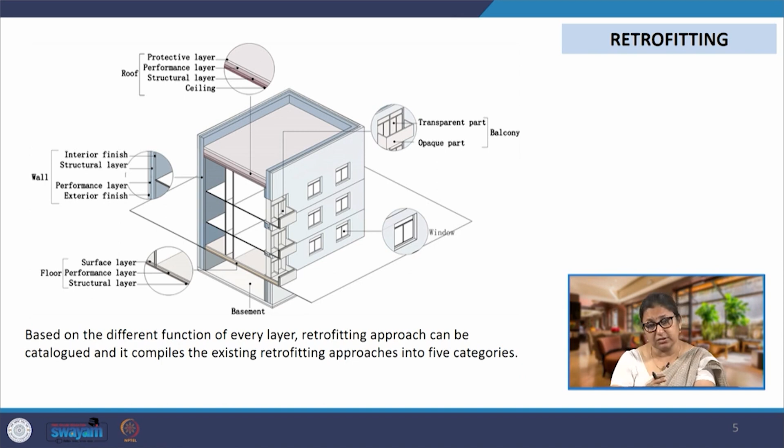Plus we have the MEP, mechanical, electrical and plumbing systems, where a lot of retrofitting measures go. Now, based on the spatial requirement, the services requirement, the functional requirement, different approaches can be taken. So there are 5 different approaches that we would normally see when we are going ahead with retrofitting.

The first one is to replace a certain part of the envelope. So we could be replacing an entire wall if it is not performing well or it has crumbled for structural reasons or whatever. So we could be replacing an entire building element. That is the first approach, which is replace. And all these 5 approaches could be used in the same building for retrofitting.

So it is not that if we have used replacement as a strategy, we cannot be using add-ins, wrap it, add on, or cover it. We can use all 5 of them together on different building components. So this is the first one, which is replace.

The second one is add in. So here we add new elements or materials inside the envelope system. The envelope is already existing and we add the new elements and materials inside.

When we say wrap it, which is the third strategy, we wrap it with a second facade. So the existing building is there, and on top of that we create another facade layer and wrap the entire building in this second layer, which is wrapping.

The fourth one is add on. We add new elements or materials on the outside of the envelope system. So the envelope existed, and then we add an additional layer, the element or material, but we are not covering all of it. We are not wrapping the entire building, but only adding some elements on certain facades or certain building components.

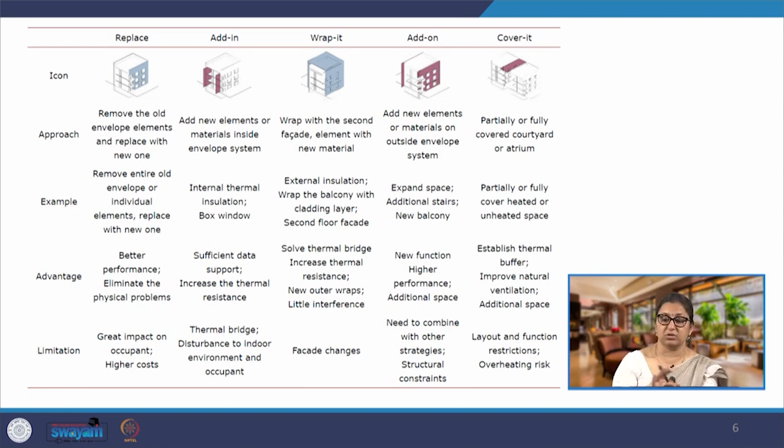And then cover it, where we partially or fully cover the earlier open or semi-open parts of it. So maybe we are covering the balcony, we are covering the courtyard. This will be part of cover it. Now all of these strategies, as I said, could be used simultaneously within the same building, but on different components.

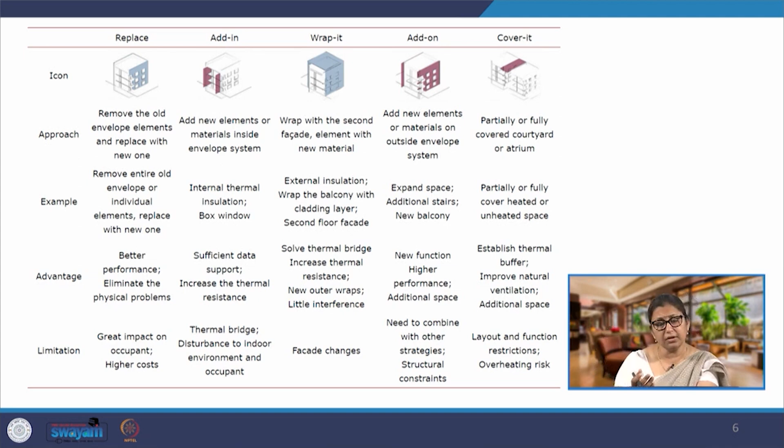Now looking at an example of each one of these: when we are talking about the replacement of a building element, of the envelope element, what we could be doing is, for example, there was a brick wall, but now we want to construct some load on it or an extra story on it. So we could be replacing this brick wall with a shear wall, or we could be replacing an entire wall with a glass facade.

Suppose the use of this space is changing, and we are making it from an office building into a restaurant or a party hall, a banquet hall. There we might want more of a glazed facade for people to see from outside to inside and vice versa. So we are replacing an entire component - that is replacement.

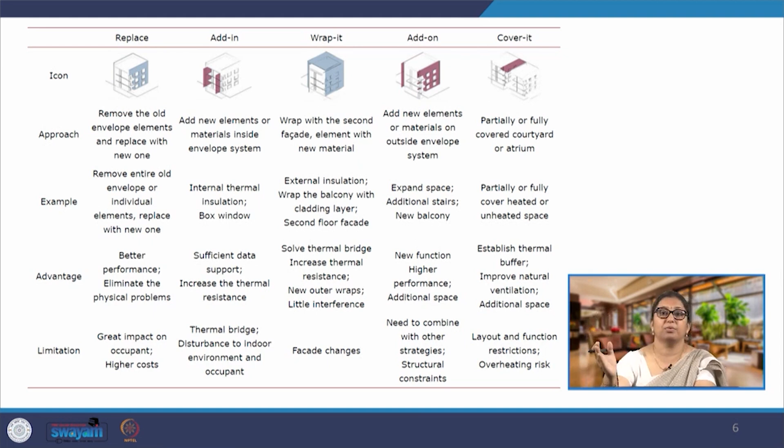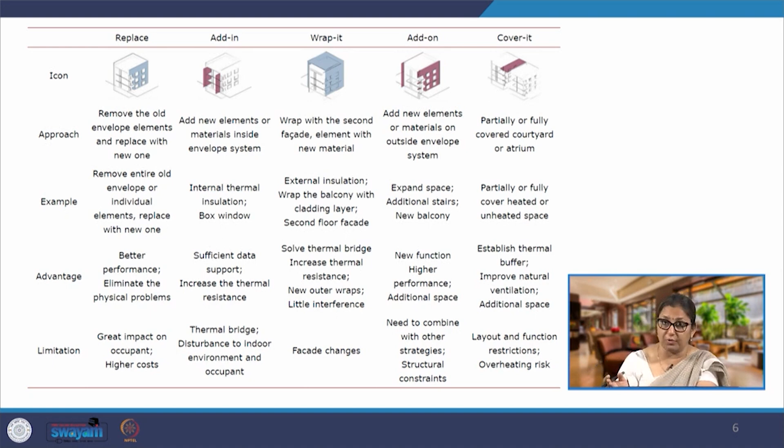Now add-ins, for example, we can add thermal insulation inside - this will be an example of add-in. If we are adding the insulation on the outside and an entire layer is being added, that will go in add on. So we are adding on top of it, or we may be adding a complete insulation plus the top layer, the protective layer or the aesthetic layer, the metal cladding. So this will all go as part of add on.

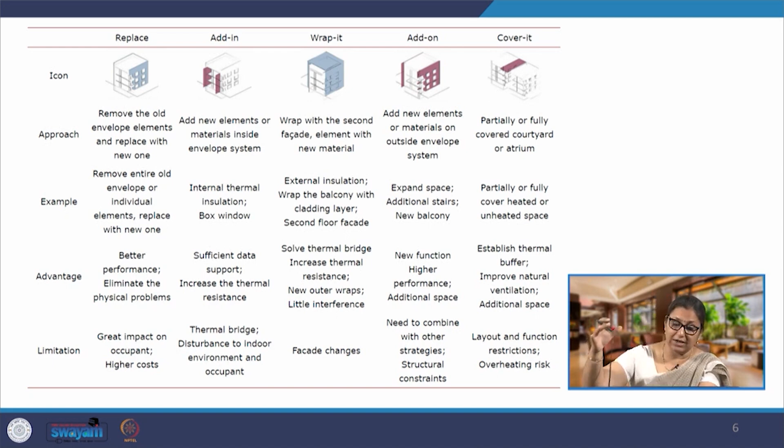When we say wrap it, it could be external insulation, but the entire building is covered using it, or it could just be, say, a metal sheet cut using CNC with beautiful patterns, creating an additional layer of shading, with a gap created in between to be used as a corridor. So this is wrapping the entire building using the second layer.

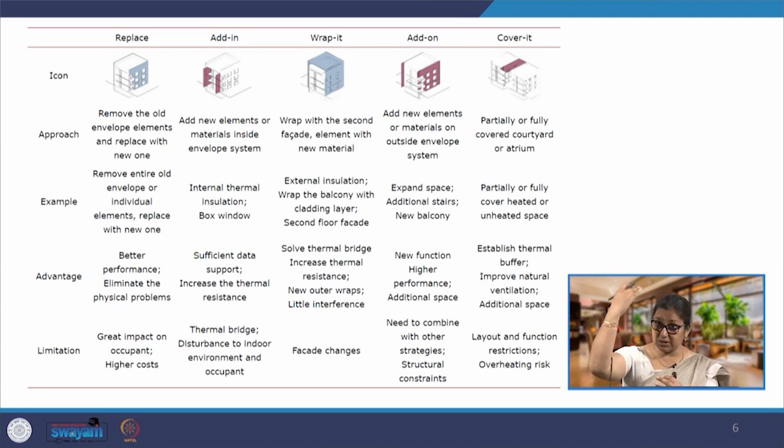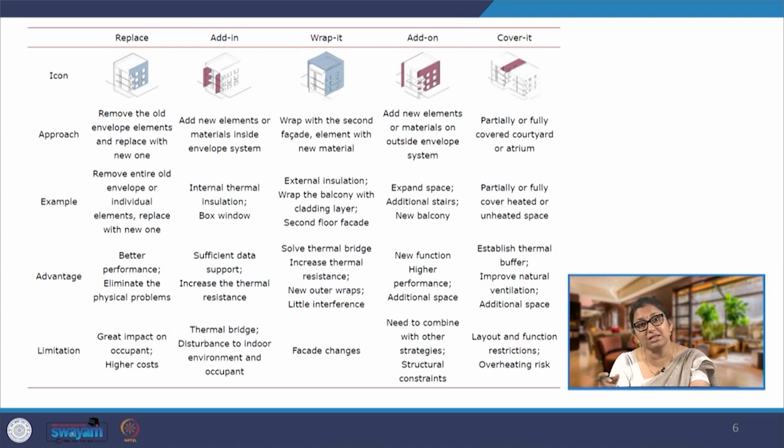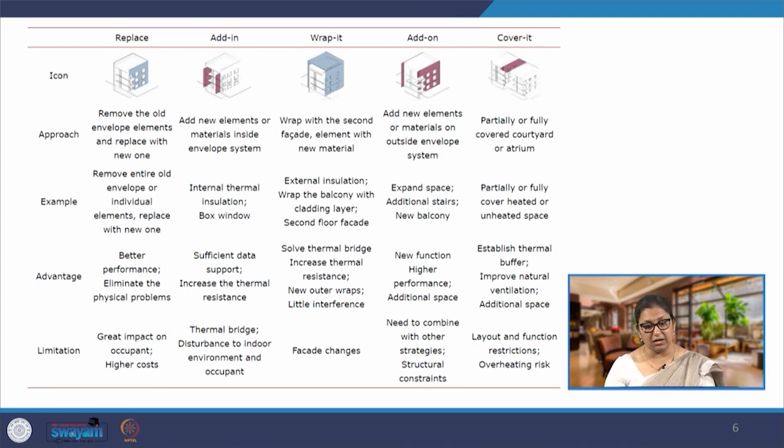And when we say covering, we may be covering these spaces - courtyard or balcony - to heat them or cool them, which was previously unheated or uncooled, a non-air-conditioned part. So we cover it in a manner that it now becomes integral to the indoors of the building. So these are the different 5 approaches in which we can go ahead with retrofitting.

So, 5 different approaches, and how we go about them in a stepwise manner could also vary - it has to vary from project to project. There cannot be any one sacrosanct linear process for retrofitting, because each building was serving a different purpose and is now being retrofitted for a different purpose. There could be occupants already occupying the building, so it is done in a phased manner where some part of the building is retrofitted at a time.

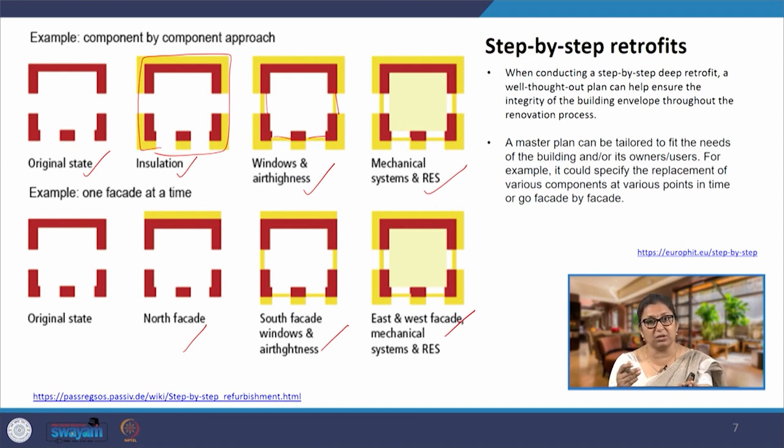So, doing the exteriors first and then gradually moving into interiors, that too in a phase-wise manner. That is what will define what approach we take.

Now, why are we retrofitting? Largely, a lot of retrofits are getting done because of energy requirements, to reduce operational energy requirement. This reduction helps us get a significant reduction in scope 2 emissions. So the moment I say reduction in operational energy requirement, we are directly reducing the scope 2 emissions.

Now, there could be a question in your mind, a contest that we are adding extra materials, for example insulation, which will be synthetic. There could be scope 3 emissions coming along with the material, and then we get scope 2 emission reduction. So we are adding scope 3 upstream emissions while reducing scope 2 emissions. How do I balance it out? Maybe eventually we would be getting higher emissions at the end of the building product's life cycle.

So what we have to do is a proper calculation: how much scope 2 emission savings are we getting versus how much addition in scope 3 upstream is being added. If we compare both together and actually get the life cycle emissions over the entire life cycle of the building, we would be able to make a clear decision on what to use and what not to use.

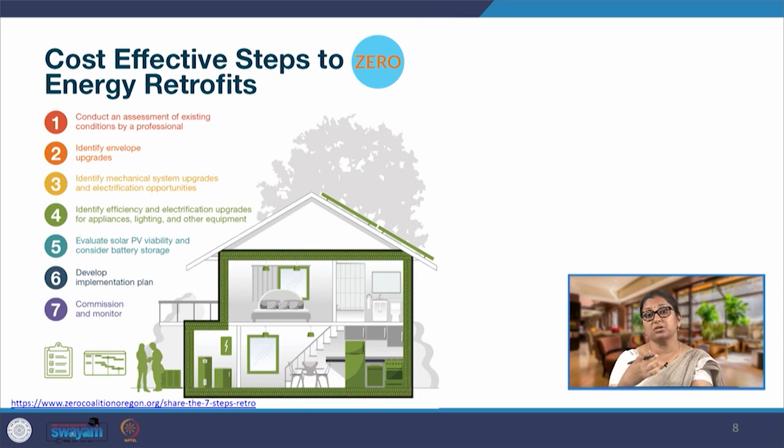So, we have to develop a proper implementation plan for how the retrofitting will be done in a phase-wise manner, and finally commission it. Monitoring becomes extremely important because a lot of times we design absolutely correctly on paper, but when it comes to implementation and monitoring, due to lack of monitoring and commissioning, the systems are installed in a manner that they do not perform as well as planned and desired.

Now, if we look at retrofitting techniques, there could be two. One, when we say retrofitting, we could be retrofitting the structure. In a lot of cases we would need to retrofit the structure, because in retrofitting we are also changing the usage of the space most of the time. So we are retrofitting it to be used as some other type of building, maybe a residential building converted into an office building, or an office building converted into a residential or recreational building. So there could be structural changes also.

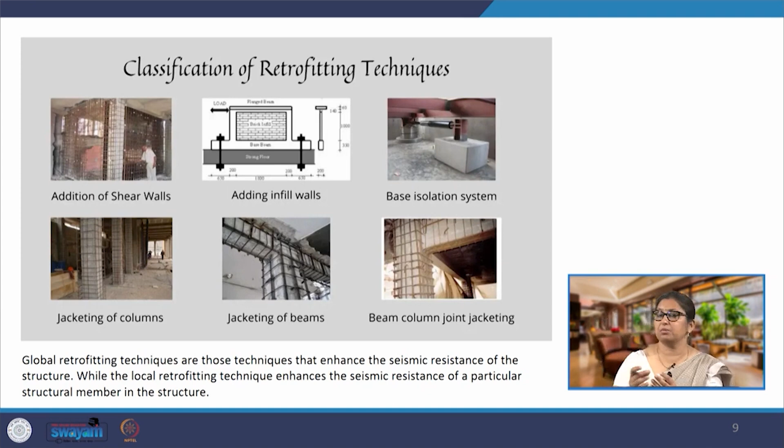So what we would see is solution strategies such as structural jacketing of beams and columns, and provision of extra reinforcement in the roof. So all these are structural retrofitting which might be required, not just for energy retrofit but for structural purposes. We may need to add certain extra columns or move certain walls. Additionally, if it was a load bearing wall, we may need to provide an additional structural beam or something like that. So these are the different structural retrofitting requirements which we might be needing.

Now moving on to renovation. When we look at renovation, we are looking at three primary objectives. One is to increase the lifespan. Why do I want to renovate? I want to renovate because I want my building to be functional for a longer period. Continuation of this functionality has to be there. So that is the first and primary objective, which is to increase lifespan.

The second one is to reduce the demand for material consumption, and this also includes resources such as energy and water, and making use of new generation materials—that is, we are looking at circular economy here. So when we say renovation, the primary objective which the client or occupant would have in mind is to add life to this building so it continues to function for another lifespan. Additionally, we are looking at making it more and more efficient. As we go forward we have higher energy and water efficiency standards, plus new generation materials and technologies, so we also have to add them into the renovation plan. These are the three things we have to do.

Now, how do we do that? For increasing lifespan, we are basically trying to increase the intensity of use. For example, as I gave earlier, if an office building has to be converted into a residential building—why? Because the office has become redundant. After COVID, after the pandemic, probably offices are not needed anymore. People are working from home, working remotely. So the office space is now redundant and it can be converted into residential space to increase the intensity of use, which has gone down tremendously for the office building now. That could be the case. So we are looking at increasing the intensity of use.

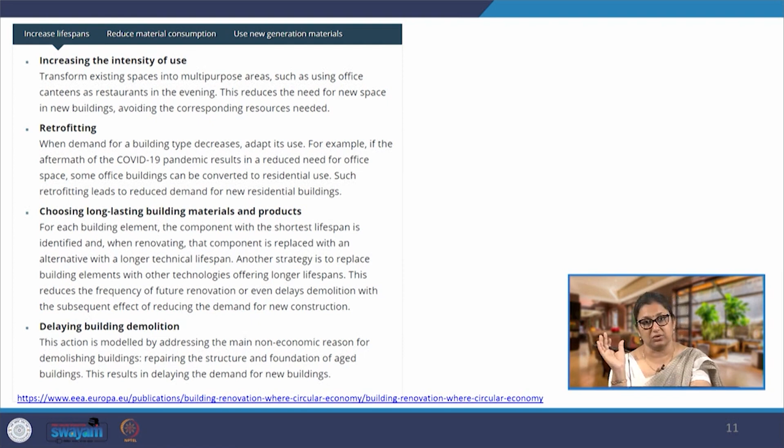We are also looking at not just space retrofitting, but materials which have a longer life, so intensity of use is increased and its life simultaneously is also increased. Through all these measures, we are delaying the demolition. We do not have to demolish the building, making it structurally better, healthier, and putting it to better use with increased intensity of use.

Now, while doing that, we have to reduce material consumption. We do not have to add a lot of material just like a new building. So how do we do that? We basically use products which comply with design for disassembly.

If you consider a brick wall, and it has to be demolished and replaced with another wall, what will happen? A lot of this material, brick, will be broken and will not be put back into use. Some of it will still be, but the mortar and plaster on top of it will surely not be used back into the process. It can be used for infill, or as subgrade or something like that, but it cannot be used back for the same purpose.

However, if we look at design for disassembly principles, the materials which comply with that can be installed and very easily taken out, and they can be reassembled into some other form. So these are the materials which we need to check out for and prefer to use.

Then we have to maximize the recycled content of the materials which are going to be used for renovation. So we might be using salvaged materials, or products made out of salvaged or recycled materials, but at the same time having a longer life. So we are looking at multiple factors together.

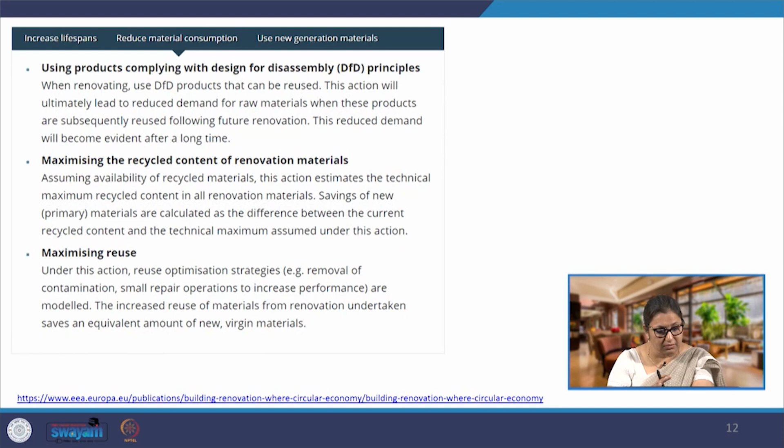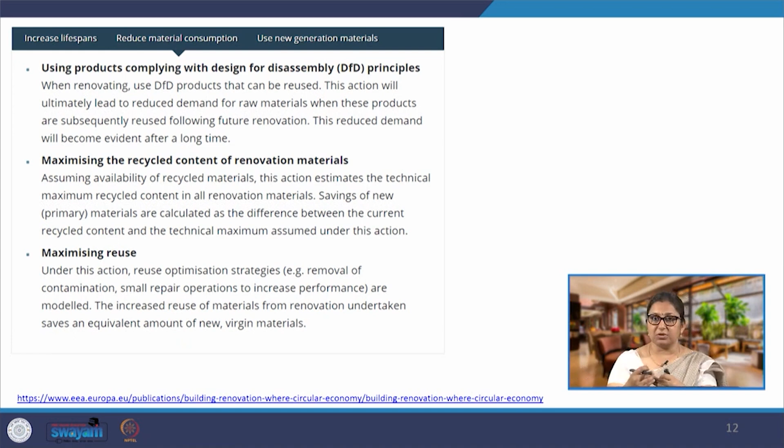And the last one will be maximizing reuse. We are talking about reuse of the materials. What happens to these materials? We have to select them appropriately and then maximize reuse when refurbishing, and when demolishing or taking off certain portions of the building.

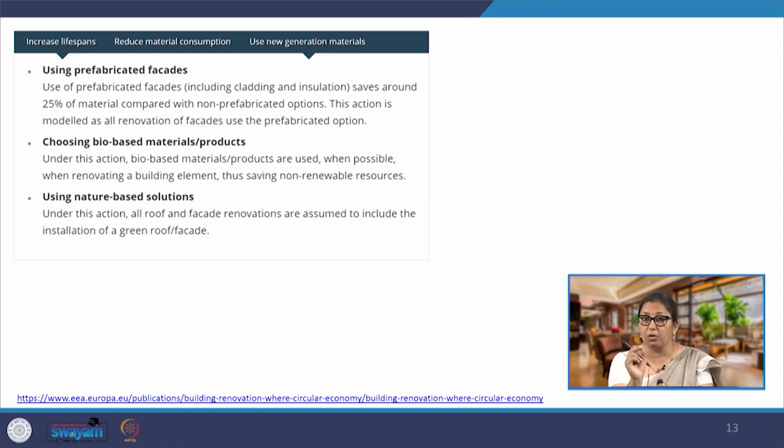And the last one is to use new generation materials. We could be using prefabricated facades, bio-based materials or products. So newer materials are available, nature-based solutions could also be there. The market is full of these new generation materials. We have to select them on the basis of the factors we discussed earlier, so we have to know what is the requirement and then select the material appropriately.

Then is to reclaim or reuse, so demolish certain parts of it and then reclaim, reuse, and remanufacture it. And the last one is to fully recycle or compost. So we are looking at all these strategies somewhere or the other, but the best is to retain. If we retain a large part of the structure of the building, we are actually looking at tremendous savings in terms of embodied energy.

But if we further have to go, we will look at some of these strategies. They could be in a stepwise manner depending upon the purpose, but they will still be lesser than if we completely demolish, dispose of the waste, procure new materials, and rebuild the building absolutely new. But if we know that this is how it helps the environment and economy and everything, then why are things not happening?

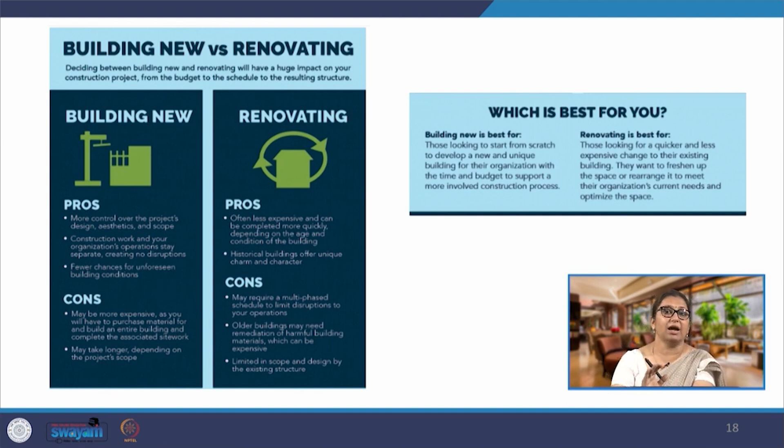The other thing is that if we are renovating and retrofitting some very old historical building, it will add the charm which a new building can never have. If you go to old historic cities, you would find that the majority of old buildings have been retained, refurbished, and retrofitted. This is very common for buildings or cities where more historic buildings are present, which can never come with a new building.

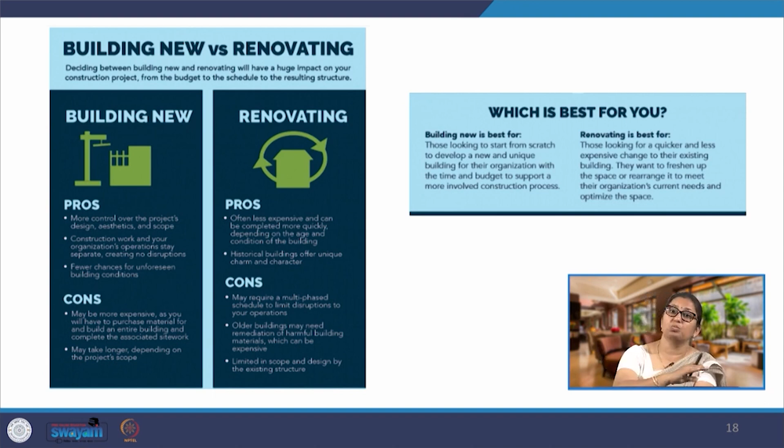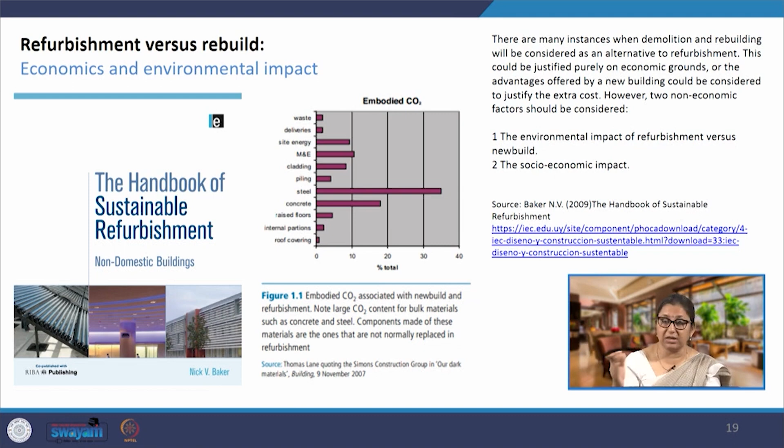So with these pros and cons, we have to decide what would be the best strategy for us. If we overall look at the carbon dioxide emissions associated, we can clearly calculate based upon the material that is going to be put in. For a new building, we know how much material is going to be used, and we already know the emission intensity and carbon footprint of each material from databases, so we can compare it with refurbishment.

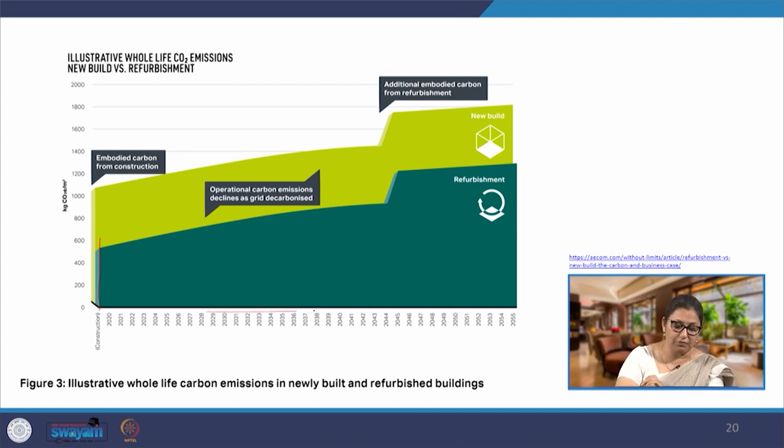There are going to be multiple times the emissions that accrue from new buildings compared to refurbished ones, over the life cycle of carbon emissions. We will see that refurbished buildings will be significantly lower throughout their life cycle than new buildings. We add some amount of embodied carbon from refurbishment, but if we are completely constructing new, this entire initial block of embodied carbon will be added to the new building.

Now, if we look at a refurbishment project, or any building project for that matter, every building as a product will have some limited life, but not all the systems within the building will have the same lifespan. We have to clearly know what these different layers are and how much lifespan each has.

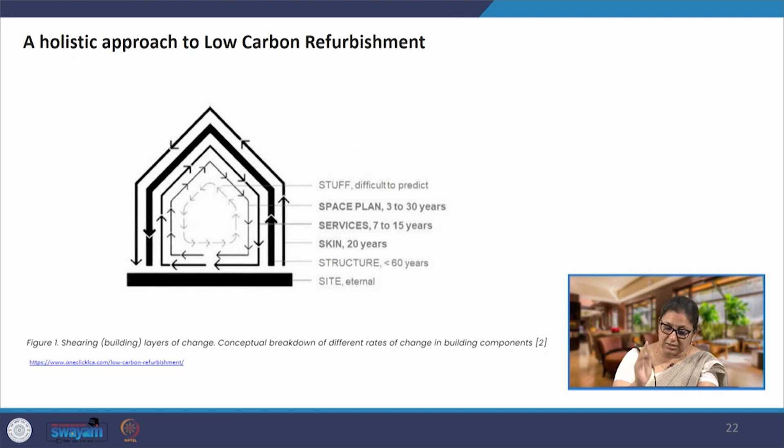Now why we are looking at this is we examine the materials that are going to be used for each one of these components. If we talk about services, we know what materials go into them - we can't plan services for eternity. This building is not going to be there; the services are going to be replaced much sooner than the life of the building. So what kind of materials should we select for services, for structure, or for skin? This is what we have to clearly understand.

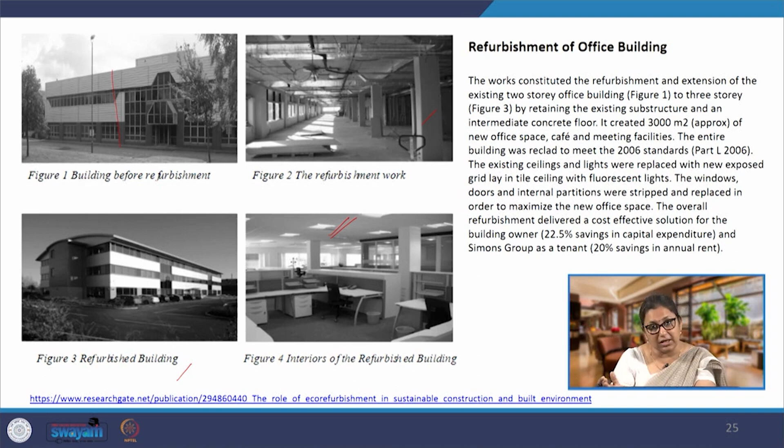I hope with this you have understood the idea behind refurbishment and retrofitting for existing buildings. The principles remain the same - passive design principles, factors affecting material selection, and the emissions associated with materials - all these principles remain the same, but instead of applying them to a new building, we are applying them to retrofitting and refurbishment.

I will stop here, and we will look at some case studies for new projects, not refurbished projects, to understand the whole idea of scope 1 and 2 emission reduction through building design and construction, in the last lecture of this week.